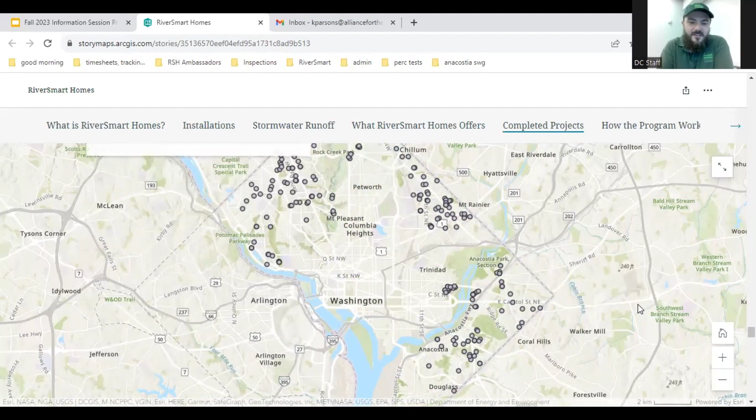So how does the program work? I mentioned you get started by receiving an assessment. That assessment results in a report, and that report declares your eligibility to participate in the program, whether your property is eligible for rain barrels, rain gardens, BayScapes, or shade trees.

For a one-time co-payment, you can have these installations done. The rain barrels are $50 co-payment per barrel, with a limit of 2 barrels per property. The rain gardens and BayScapes can be installed each for a $100 co-payment, but there's a limit of 2 landscaping installations per property. And shade trees, we've waived the co-payment for that program, so you can have as many shade trees as you need installed free of charge.

There's another side of the program called our rebate program, where residents go through the process of installing these practices on their own and then applying to receive a rebate. We offer rebates for rain barrels, rain gardens, shade trees, and permeable pavers, or for revegetating, removing an impervious surface and installing an area where water can get into the ground.

Our rebate amount is $2 per gallon stored for rain barrel capacity, with a maximum rebate of $1,000. So a 50-gallon rain barrel at $2 per gallon will yield a $100 rebate. Rain gardens, we rebate an amount of $3 per square foot treated. That is, if you have a 400 square foot roof draining to your downspout, at $3 per square foot, you can be eligible for a $1,200 rebate.

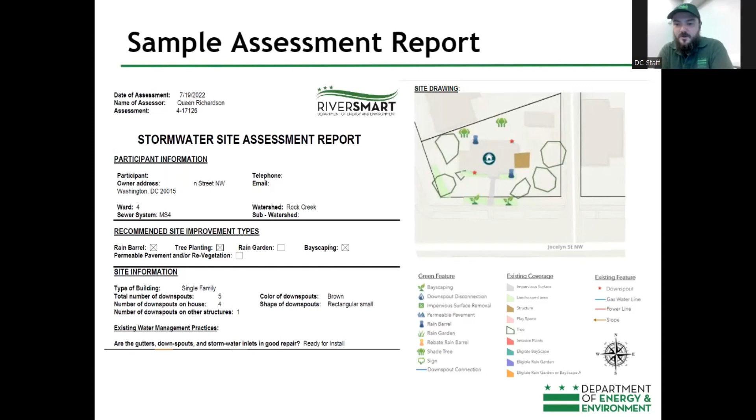It'll give you some site information about your property: how many downspouts were we able to identify, where are those downspouts located, and what is the size and shape of your downspout. This is all information that's useful to you as well as to our installers.

I'm Jordan Goknow. I work with the Alliance for the Chesapeake Bay as their DC Green Infrastructure Projects Manager.

A couple of these features - we offer a number of things through RiverSmart Homes, including rain gardens, bayscapes, shade trees, rain barrels, and pervious pavers. I'm going to specifically focus on the rain gardens, then hand it off to the rest of the team for the other practices.

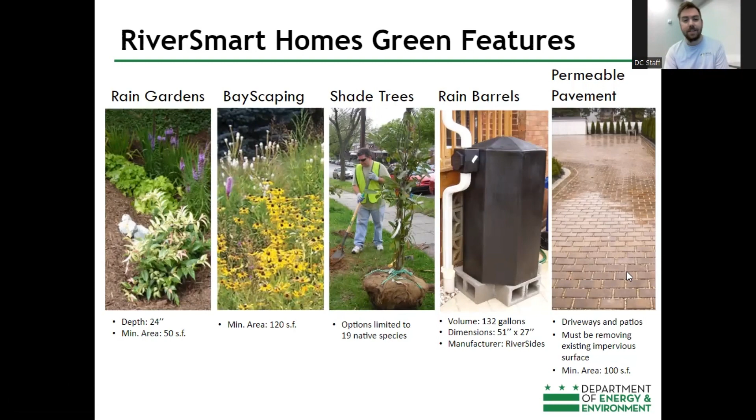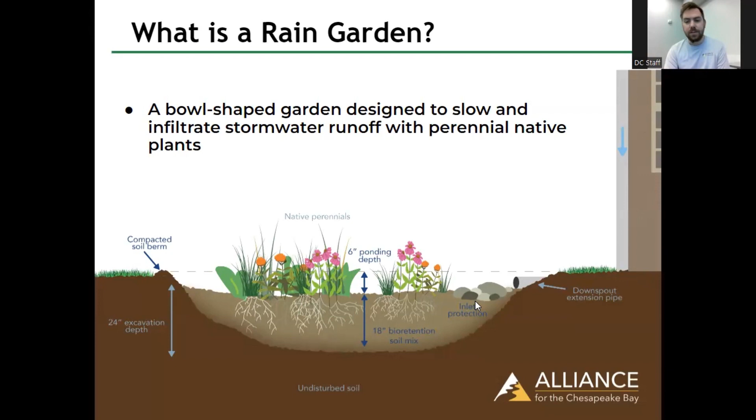As Brendan said, this is one of the most effective pieces of stormwater management. That's because it treats water as it enters - as water is entering, it is infiltrating, making room for more water. These plants are soaking up water as it comes in. It can hold a ton of water, and they're variable - you can make them bigger or smaller depending on the situation.

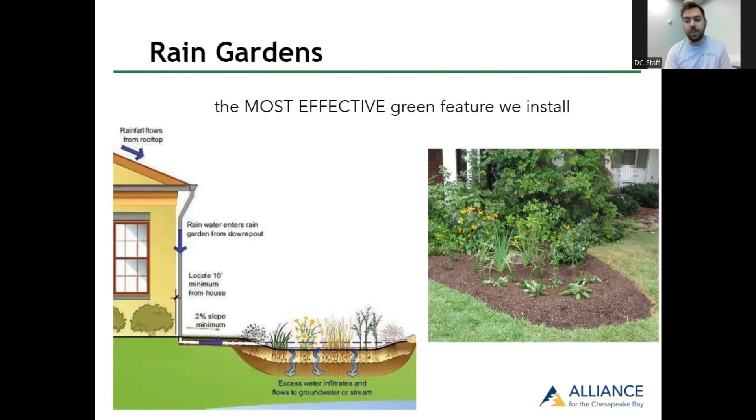There are a ton of benefits to rain gardens. They do a lot to mitigate the toxins and sediment that's coming out of our properties and into the local waterways, but they also add native plants and wildlife habitat, especially for pollinators and birds. They can be a beautiful feature on your property, in addition to a great way to capture and infiltrate stormwater.

A standard RiverSmart rain garden through the grant program has to be connected to a downspout, has to be between 50 and 70 square feet of plantable area, and should be capturing between 300 and 500 square feet of roof area from that connected downspout.

There's some other things to consider, including that it can't be closer than 10 feet to a foundation or retaining wall. This is because those hold so much water, and it can put a lot of pressure on nearby structures. Got to be 3 feet from property lines, 5 feet from public spaces.

This is because in a large storm these gardens will overflow, and you want to make sure that the water has some green space to flow over and soak into before it goes right onto a sidewalk or a driveway.

Can't be underneath a tree. As you saw in that original diagram, the gardens are really deep, so if you're underneath a tree and digging that deep, you are going to damage the roots of the tree, and we definitely want to avoid that.

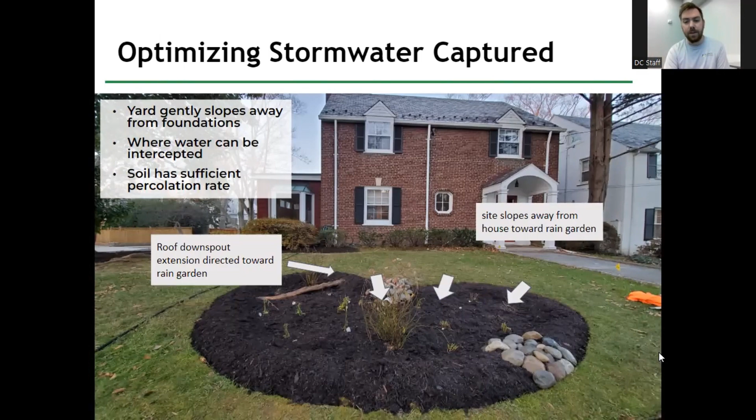Installation can be pretty labor intensive, but it's not overly complicated. You're digging out a garden—18 inches of bioretention plus 6 inches of ponding depth, so a good 2 feet deep. You can see that in the second picture. We add some bioretention mix, a good mix of sand and compost to make sure the soil is nice and loose, doesn't get compacted, and can hold a lot of water. Then you plant it with native plants and put in some spillway stones for overflow. You end up with a really nice looking garden.

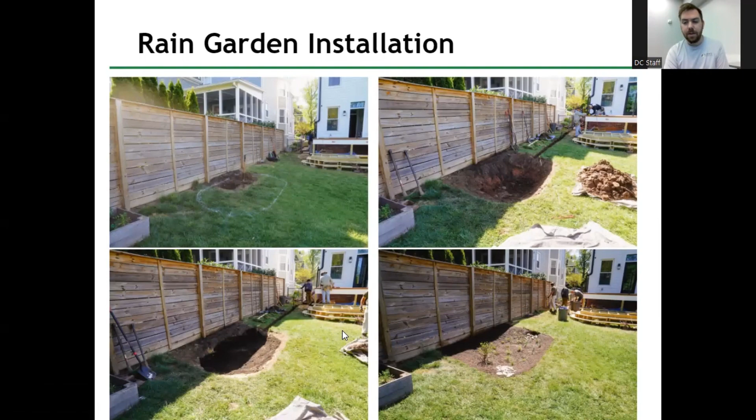As with all gardens, maintenance is essential to making sure your rain garden lasts a long time and is beautiful throughout the seasons. It's always important to water, especially in the first year, right after it's installed—those plants can dry out really quickly, so stay on top of watering. After that first year, you'll still need to water in hot and dry weather. Just because it's a rain garden doesn't mean it will get water unless it rains, so be sure to water frequently.

Weeding, as with all gardens, is essential. It's nice, loose soil, so anything nearby is going to try to drop seeds into that garden, and those seeds are going to grow like crazy because of how rich the soil is. So stay on top of the weeding. After a couple years, these native gardens can fill in with dense coverage, which will outcompete a lot of the weeds trying to grow in it. So in a 2-year-old rain garden, grass from your lawn or dandelions might not be able to grow because of how much coverage there is.

At that point, you want to keep an eye on the really aggressive invasives. Any vines or ivy, anything especially tall growing like bamboo or tree of heaven—those will still take a shot at your rain garden, so you do want to stay on top of that.

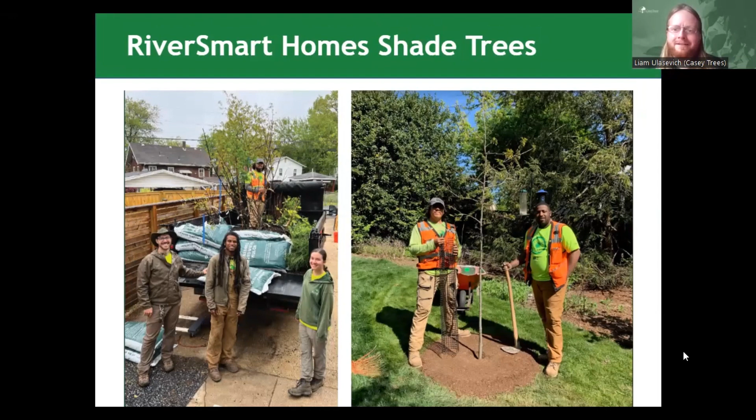So what is a shade tree? Brendan kind of already alluded to what it is, but it's basically a size class—it's a tree that, when mature, is over 25 feet. And we can think about why we want that in the next slide.

So there are a lot of benefits to a shade tree. Being a bigger tree, there's an overall greater impact—more leaves, deeper roots. There are all kinds of things they bring to the environment: habitat for wildlife, improved stormwater management.

Trees have the ability to reduce air pollution, which is a big topic in the city. A lot of people in these tree deserts have higher occurrences of respiratory issues. And then also the effects of heat can really have a downgrade on individuals' health.

From a resident's perspective, it can really cool down your house. And for the city as a whole, it has a cooling effect with the urban forest.

In general, living in the city we're very detached from nature, and having trees around really increases quality of life. There's a lot of studies that show the psychological value of having greenery around you. It makes you happier, and gets you a little more in touch with nature.

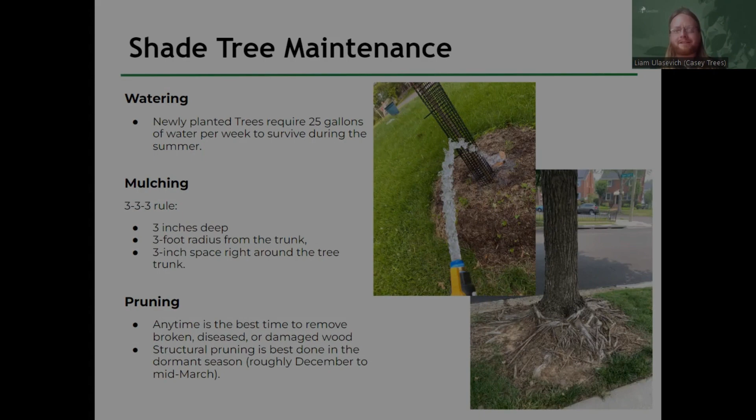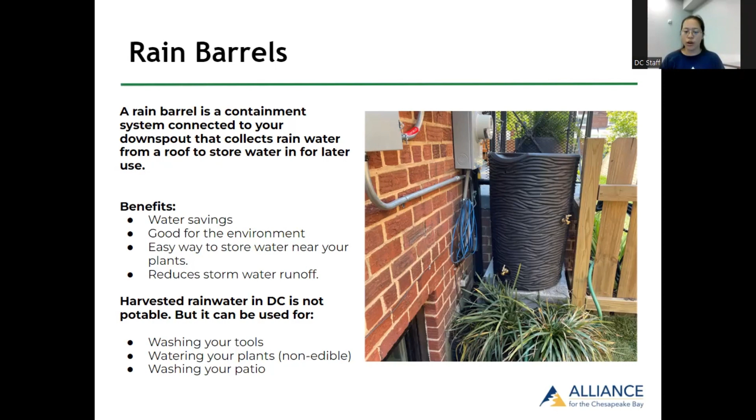One quick thing, if you decide to use the water from your barrel to water any edible plants, we do recommend that you wash them off, as the water isn't quite potable because it's coming right off your roof, and sometimes your roof can have bird poop on it, or shingles. You don't really want to be drinking that. So just wash your edible plants really well if you're using it for a vegetable garden.

So some components of the rain barrels. There's the downspout, that is the vertical pipe running down from your gutter to the ground. There's the inlet, which is the downspout connection into the barrel. It often has a screen, sometimes it doesn't.

The screen, which is super important, is a filter mesh that keeps bugs, mosquitoes, and debris from entering the barrel. The screen can sometimes be in the inlet, but sometimes it can actually be found on the barrel.

There's the overflow that is used for water to safely exit the barrel once it has been completely filled. It's often built into a diverter kit. There's the spigot, and then there's also the base, which is usually elevated about 8 inches above the ground. The base needs to be flat and level to have a safe foundation for the barrel.

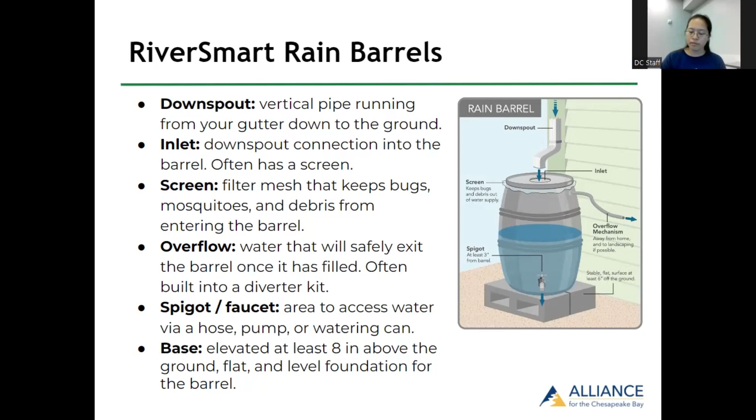So there are two programs for the RiverSmart Homes Rain Barrel program. The first one we're going to touch on is what I like to call the installation program. This one relies on your audit, and it will let you know what you're eligible for. There are 2 different types of barrels in this program.

The first is the Riversides. It is the bigger barrel, 132 gallons, with a co-payment of $50. The dimensions are about 5 feet tall, 3 feet in diameter, and it is quite sturdy, which is really nice because it should last you about 8 to 10 years if you do proper maintenance on it.

When an installer comes to your home, you want to make sure that the ground is leveled and clear, like the picture you see down on the left. If you aren't quite sure how to level and clear it, you can also pay the contractor $20 to level and clear it for you.

Then there's the other barrel on your right, the Hydra barrel. It also has a $50 co-payment. It's a little bit smaller, which also means that if you have a roof area over 500 square feet, we will not be recommending this barrel to you. You will default to the Riversides.

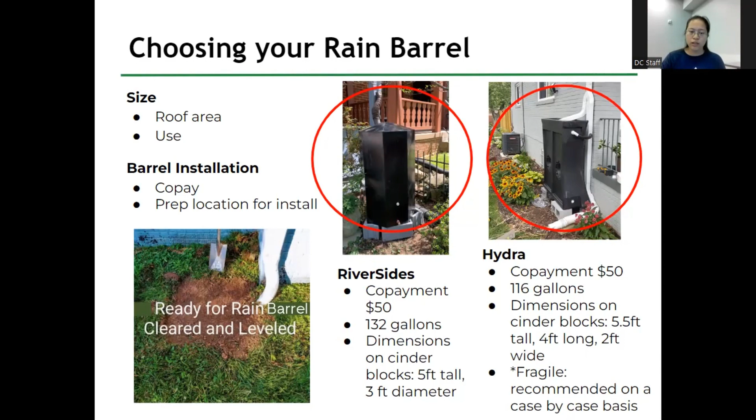So in the assessment, when the auditor comes to your home, they will take photos of the downspouts that are eligible, and they will be put in the audit, so you know which downspouts will be best for a barrel. Here you can see the before and after photos.

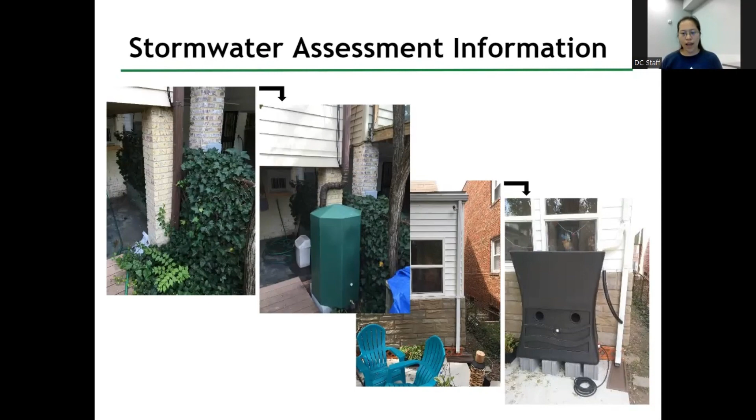Barrel maintenance. Yes, all of our programs have a maintenance component, and there is seasonal maintenance. In spring, when you start using your barrel, the spigot should be closed and the barrel should be on collect. In winter, we don't want water to freeze in your barrel because it'll probably crack, so you can have the spigot open so any water that comes in can also flow out.

Depending on what diverter you're using: if it's the Riversides, it'll be a diverter box with a little knob you can turn so the barrel is no longer collecting water, and it'll just go straight down your downspout. If you're getting a Hydra, it'll be a Y diverter with a little toggle to the left or right. If the toggle goes toward the barrel, it'll be collecting water; if toggled to the other side, it'll be winterized and the barrel will no longer be collecting water.

So the winter setting is the most important part of your maintenance. You really do not want cracks in your barrel, especially if it's right next to the foundation of your house. Another occasional maintenance task is trying to keep debris out of your barrel.

We talked about the filter. Depending on which barrel you have, you want to make sure you're emptying that filter, either the sort of sock filter in the Riversides, or the basket filter on top of the Hydra. Anytime there's a big rainstorm, or if you have a tree right over your house or the barrel, you'll want to make sure you're emptying that debris. You don't want mosquitoes breeding in there, and you don't want to clog up your barrel because it's really hard to get debris out once it's inside.

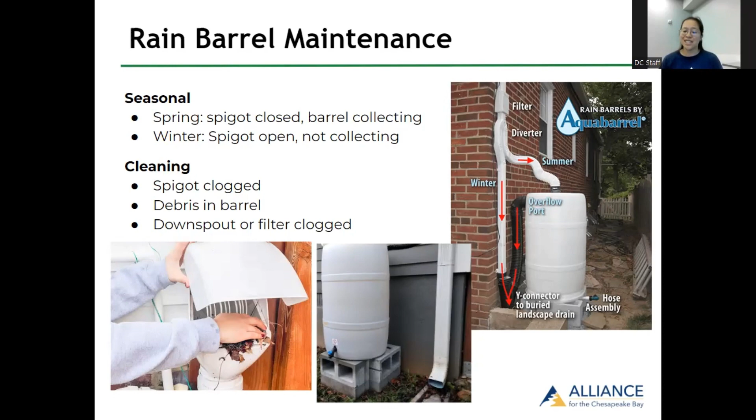For the rebate program, this is for folks who don't want to wait the 6 months for the audit process and connecting to a contractor. It's for homeowners who feel comfortable with a more DIY approach to their home. You buy and install your own barrel, then go online and enter a rebate application. You need a receipt and before-and-after photos of the installation.

The rebate program is not a complete rebate. It's $2 per gallon of water saved, so a 50-gallon barrel will rebate you $100. This does not include tax, shipping, or extra costs that may occur, for instance if your barrel doesn't come with a diverter kit, you'll need to buy that and we won't be able to rebate you on it. But since you're getting your own barrel, you have a wide range of whatever market barrels you feel are best for your home, in terms of size or aesthetic.

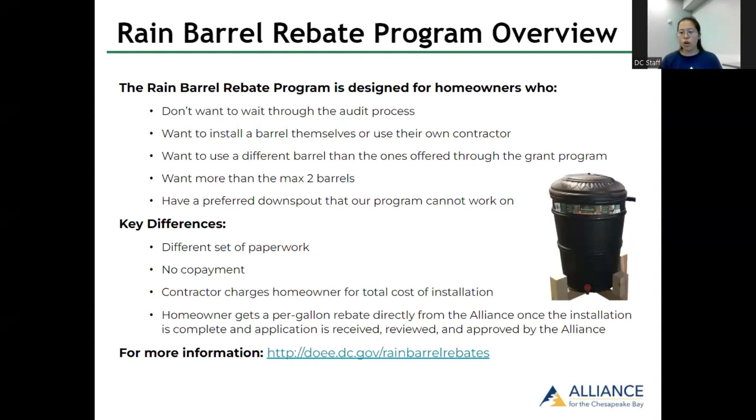So here is a really brief rundown on both programs. For the installation program, we pretty much do all the work, it's all in your audit. The types of barrel you can get and where you can get it will be determined by your audit. It's a $50 copay per barrel and installation, plus a $20 preparation fee. Procurement and installation logistics of getting the barrel are covered by the program. Maintenance for the barrel is the responsibility of the homeowner.

The rebate program, again, offers almost complete flexibility. It is DIY: you buy and install your own barrel and then apply for a rebate, and the rebate application is done online.

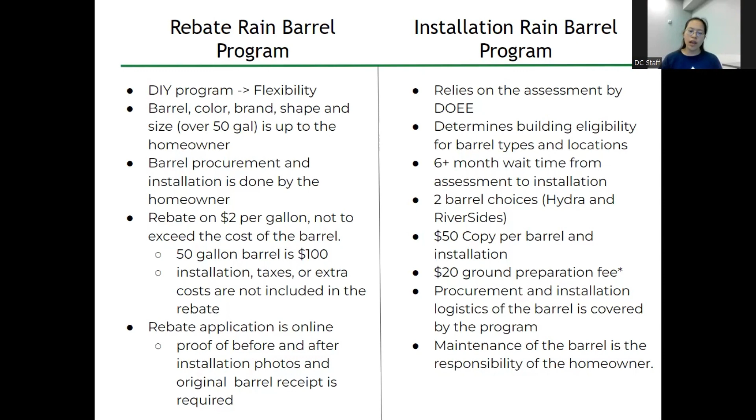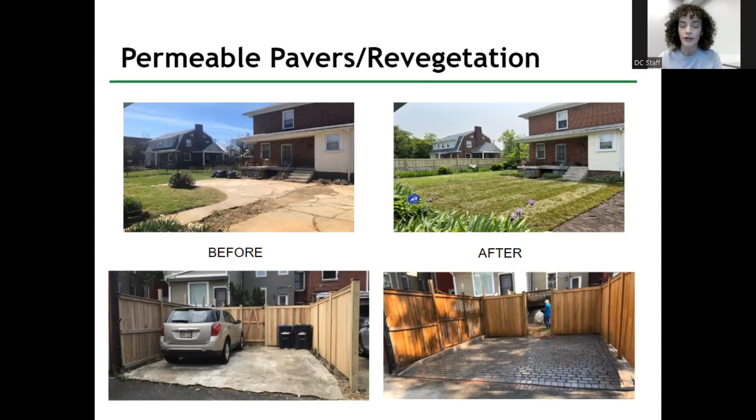First thing to note is there are two routes you can go with the permeable surface rebate program. You can go for what's called revegetation, sometimes referred to as impervious surface removal — this top before and after picture is a good example, where you're removing an impervious surface and replacing it with some kind of vegetation. The second route is permeable pavers, which the bottom before and after photo shows: removing an impervious surface like concrete or asphalt and replacing it with permeable pavers.

What are permeable pavers? They are a self-draining system of individual pavers. As you can see in this first photo on the left, we use permeable interlocking concrete pavers. They look like regular brick pavers, but they have little tabs on all four sides where they fit together, kind of like puzzle pieces, forming an interlocking structure. Those gaps between the pavers are where water is able to infiltrate down into the paver system.

This cross-section detail I really love. You can see that the pavers are really just that top thin layer, and then there are multiple layers of subbase of different types of gravel underneath, going about 10 inches deep. The pavers you see on top are right at the surface. So it's a pretty deep system - in total it can be 12 to 15 inches deep into the ground, and that's what allows for so much stormwater infiltration with these systems.

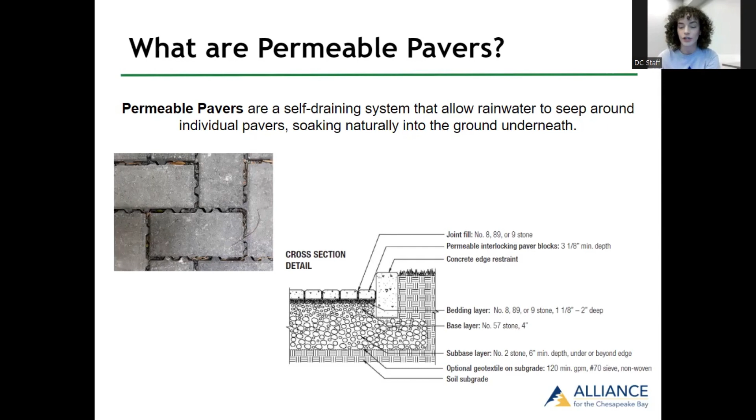Some things to note about permeable pavers: as was said before, they're really good for patios, parking pads, driveways, any surface that you still want to be able to use as a paved surface. In terms of the RiverSmart Permeable Surface Rebate Program, the minimum project size for permeable pavers is 100 square feet.

The pavers must be installed by a certified contractor. This is super, super important. We do have a contractor list available online - all contractors on that list have been pre-approved and pre-vetted by the RiverSmart program. Other contractors are able to install pavers, but they have to show us a permeable interlocking concrete paver certification. If you have any questions about that, feel free to let me know during the application process.

Also, all projects must pass a percolation test, just to ensure that the pavers, once installed, will have the infiltration capacity they should. And all projects need a downspout to be connected - whatever downspout from your house or a building on your property is closest to where you'd like the pavers, we'll typically have that downspout redirected. It actually goes underground into the paver system, as you can see in this picture. The downspout is redirected underground and into the middle of the subbase gravel layers.

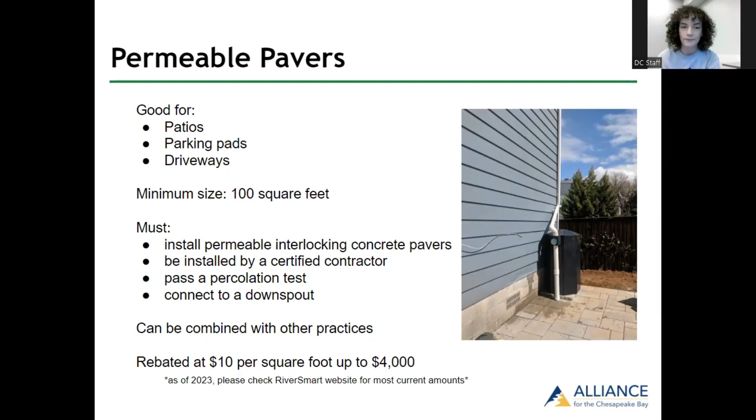Revegetation - here's a lovely before and after photo of a really large project. Revegetation is a great option for folks who have a really long driveway or parking pad they don't really need anymore. In this case, it almost looks like a parking lot that the homeowner didn't need anymore, and they wanted to revegetate it for their pets or just to have more green space on their property.

The minimum size for these projects is 200 square feet. In terms of vegetation you can use, it can really be almost anything - most projects will see sod or grass seed. You can also use different plantings or even trees, which is another great way to combine this rebate program with other RiverSmart practices.

Something else to note is that you can do a combination between revegetation and permeable paver projects. I'll use this photo on the right as an example - they happened to replace the entire area with sod, but if they wanted to keep maybe one parking spot, they could have replaced half of this concrete area with sod and half with permeable pavers. That's perfectly acceptable with the rebate program - we love projects like that, and we calculate the rebate based off of that area. Revegetation is currently rebated at $5 per square foot, up to the same $4,000 maximum per property.

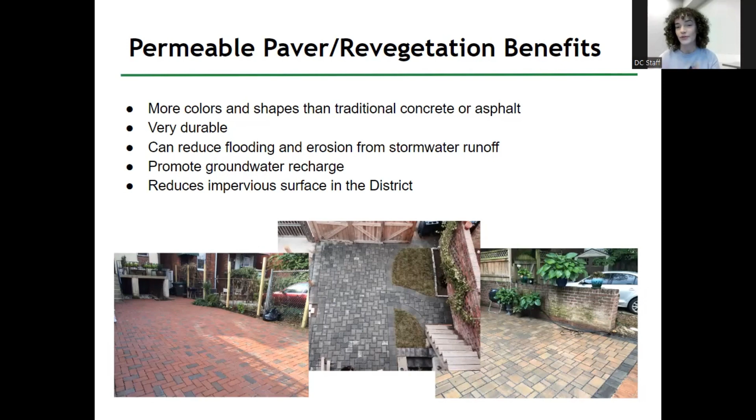They're also very durable because of their interlocking structure. They're really good under vehicle traffic and anything that puts pressure on them, because they're able to move around individually as opposed to concrete or asphalt, which might be a little more prone to cracking over time. Like all these other practices, permeable pavers and revegetation reduce flooding and erosion, promote groundwater recharge, and overall, most of all perhaps, reduce impervious surface in the district.

Maintenance is super important. General upkeep is going to be the most important task of all these. People often think permeable pavers come with a ton of maintenance that can be pretty pricey. That can be true if regular upkeep isn't performed, so this regular upkeep is really, really important.

DOEE has a great set of maintenance videos available on their YouTube channel. That's what the screenshot is from.

General upkeep includes sweeping the surface of the pavers. That's really important, especially during the fall, because the gaps between the pavers is where water infiltrates into the ground. If those gaps become filled with leaves, grass, mulch, or any organic material or debris, the paver system can clog, which is where maintenance can get pricier. Keeping the surface clear of debris is one of the most beneficial things you can do, and it's pretty easy to do regularly.

Cleaning out the filter is important too. On the downspout that's redirected into the pavers, there will be a filter similar to the ones Maya mentioned for rain barrels, with a lid. All you have to do is lift up the lid and take out anything caught in that filter. That's also really important to keep the paver system from clogging.

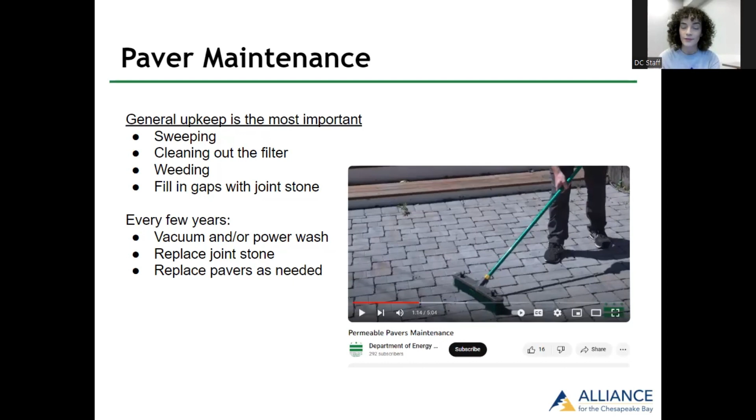If that general upkeep is done, you're all well and good. Every few years you may need to vacuum or power wash the surface of the pavers, and again replace that joint stone, since vacuuming or power washing will displace a lot of the stone between the pavers. Then replace pavers as needed. As I said, they're super durable - none of them should really crack for many years after the first installation - but replacing those as needed ensures the system keeps infiltrating stormwater as it should.

I'm going to talk a little about the rebate application process for the Permeable Surface Rebate Program. I want to stress that it's separate from the application to the RiverSmart Homes program in general - there's a separate application for this rebate. You can apply for the Permeable Surface Rebate Program whether or not you've received a RiverSmart Homes assessment; you don't need one to apply. So there's a separate application, which I'll show on the next slide - I have a couple of screenshots.

You'll submit that application to the Alliance. We review it, and then schedule a pre-construction inspection with you. That's just for us to go over the project design - we'll measure your impervious surface, whatever you're trying to remove, and ensure the project you've set up with a contractor meets all the RiverSmart requirements before construction actually begins.

Construction is pretty deep - the demolition can involve a lot, with 12 to 14 inches of excavation, so it's a pretty involved process. We want to make sure your project is set up to meet all the RiverSmart requirements and receive a rebate before any of that starts.